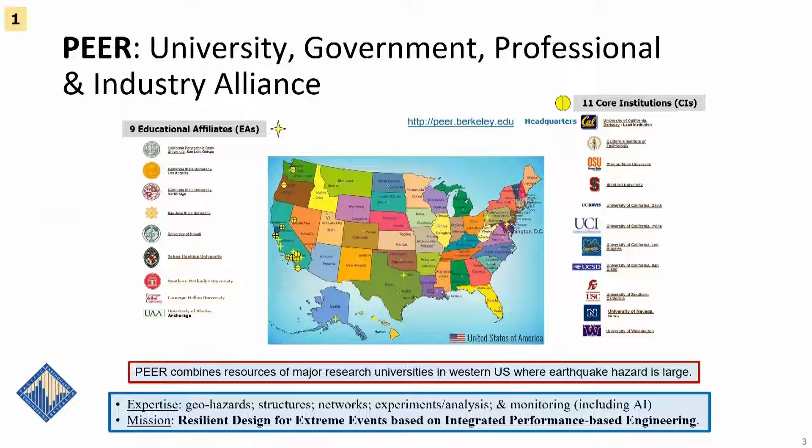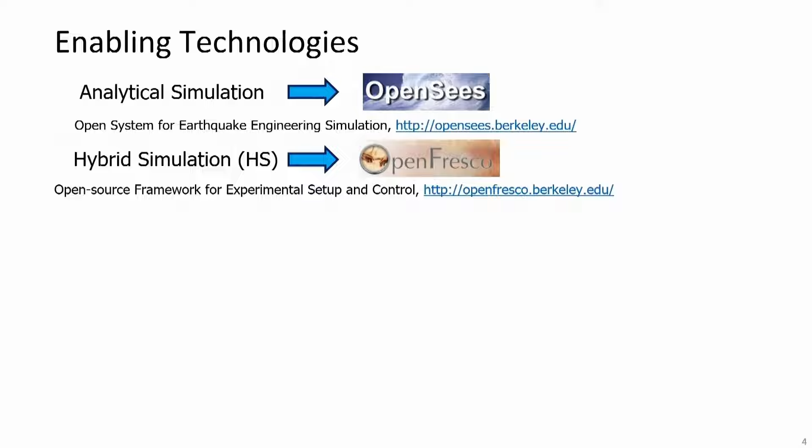PEER focuses on developing several enabling technologies for analytical simulation using OpenSees, hybrid simulation using OpenFresco, and also maintaining several databases for ground motion, PeerHub, ImageNet, structural performance database, seismic performance observatory, and also maintaining our technical report series, which currently has about 345 reports.

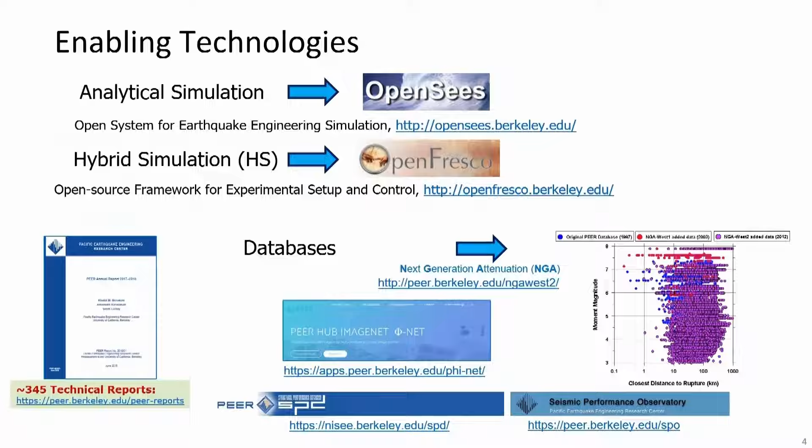So now I will talk about the motivation and need for BRACE2 research. The California State Highway System includes a wide variety of physical assets in 4 primary categories: pavement, bridges and tunnels, drainage, and transportation management system.

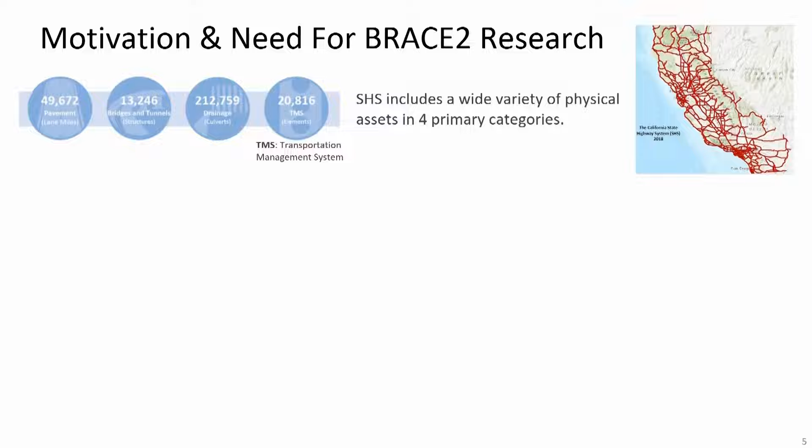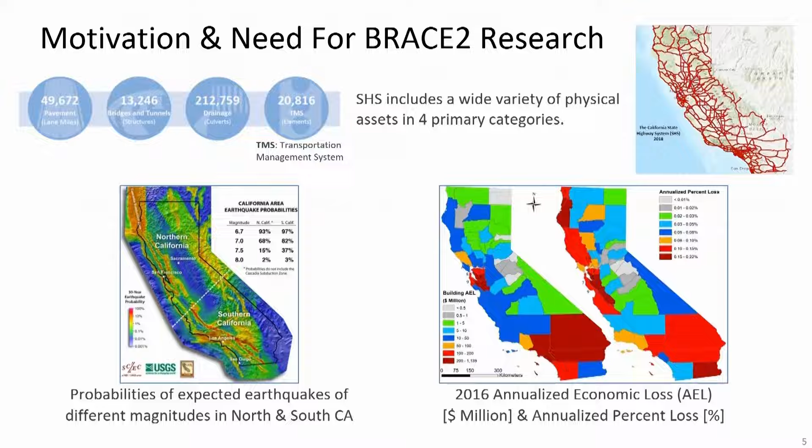BRACE2 focuses on bridges. We all know that the probabilities of expected earthquakes of different magnitudes in North and South California are high, and these high probabilities, together with the importance of the state highway system, raise issues related to the annualized economic loss, and also require having a monitoring system for proper assessment of such losses for achieving economical resiliency of the state of California.

About $25 million have been invested in strong motion instrumentation over the past 20 years. That led to 16 toll or major bridges to be instrumented, also 66 regular bridges, and having 33 geotechnical arrays. So there is a need to demonstrate that instrumentation can evaluate bridge conditions immediately following an earthquake, and BRACE2 will help response efforts of maintenance and post-earthquake investigation team.

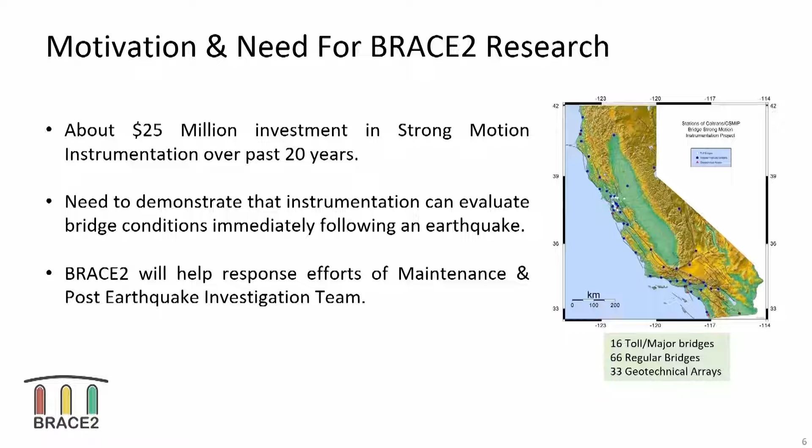The Bridge Rapid Assessment Center for Extreme Events, or BRACE2, is simply a data-driven structural health monitoring center. The objective is to develop a data and simulation framework for real-time rapid and near real-time comprehensive assessments of Caltrans, California Department of Transportation, designed and operated bridges, taking advantage of bridge sensors for condition assessment following earthquakes.

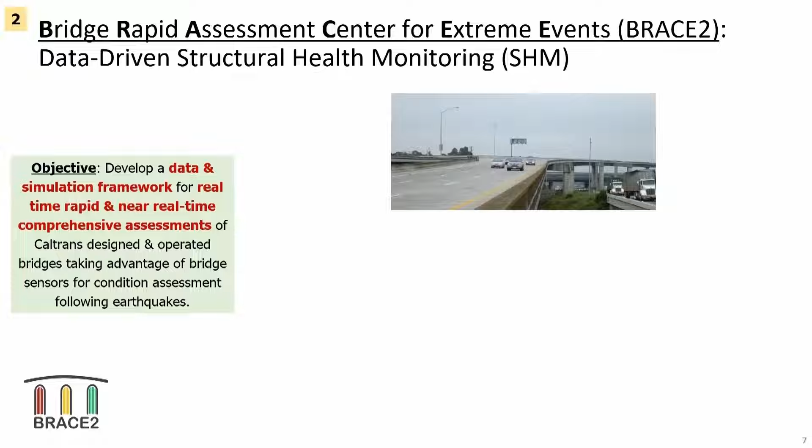So these sensors are typically accelerometers, where data is collected and then the data is used for vibration-based structural health monitoring. On the other hand, one can conduct vision-based structural health monitoring using images and videos. This type of SHM is not discussed in this presentation, and we're only focusing on the vibration-based structural health monitoring.

When data is collected, they are processed, and then decision is made whether there is damage or no damage, and that will lead to rapid or detailed maintenance reports that empower the maintenance crew to know what has happened following an earthquake event, such that maintenance operation or reconnaissance work can take place more efficiently.

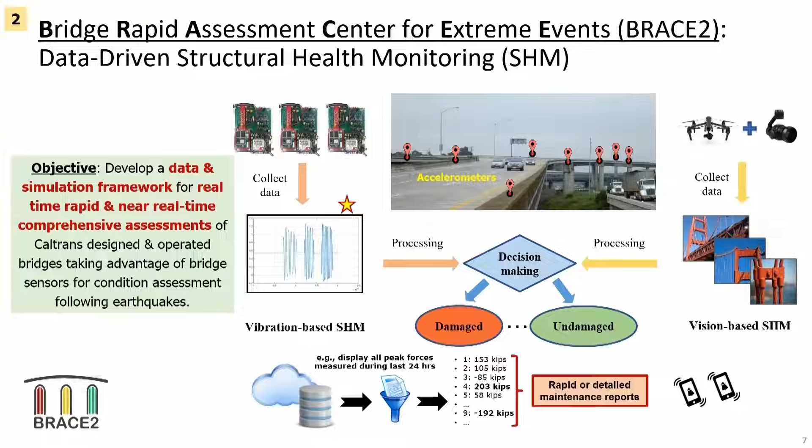In BRACE2, in this initial phase, we consider 5 bridges. The first bridge is the only one that is monitored in real time, where data is streamed to BRACE2 in real time. This is what is called the Hayward Highway Bridge. It's actually the intersection of highways 580 and 238 in Northern California.

There are 4 other bridges that we develop the necessary models for, and we make use of historical data for these 4 other bridges, but not in real time. These are the Meloland Bridge, Painter Street Overpass, Crowley Lake Bridge, and San Bernardino Interchange. These 5 bridges are located geographically in a distributed manner within the state of California to be a representative set of the different bridges in California.

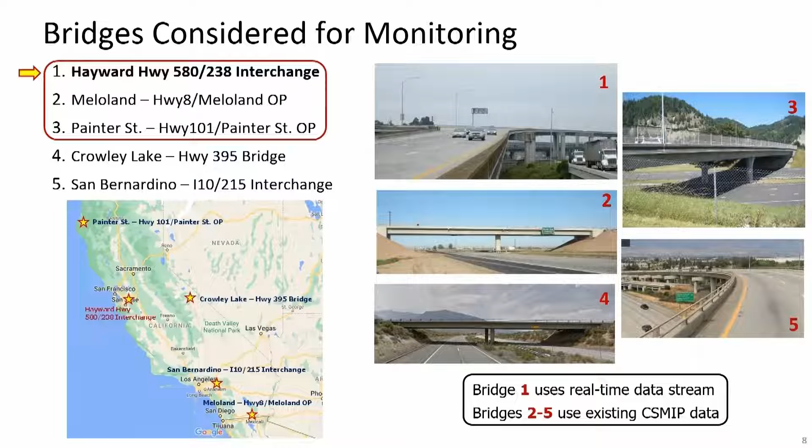The centerpiece of the work in BRACE2 is the Hayward Highway 580-238 interchange, or in short, the Hayward Bridge. It has 22 sensors on the superstructure, and also about 10 sensors for the geotech array, for a total of 32 sensors that are monitored in real time, with data streamed in real time to BRACE2.

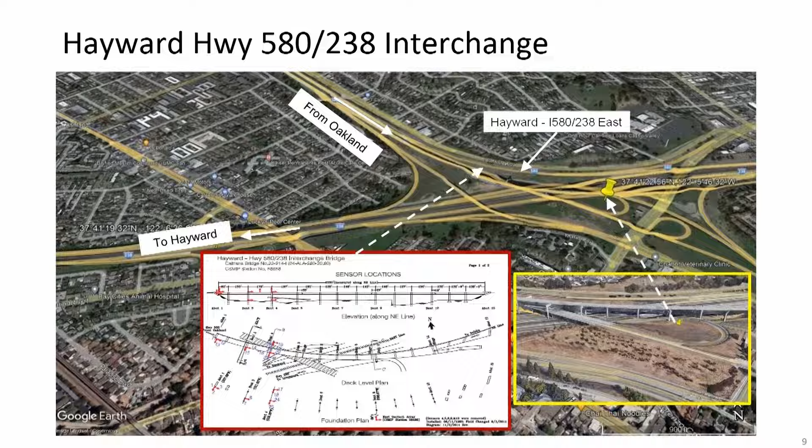The core components of BRACE2: at its center is the decision-making platform, or DMP, which receives data from the Hayward Bridge and its geotechnical array accelerometers in real time. This is done in collaboration with California Geological Survey, where we receive not only the processed data, but also the raw data in real time.

Together with component modeling, which determines the component limit states, we compare these limit states to the demand from the data, so we can inform Caltrans in real-time rapid assessment with recommended actions.

Another type of assessment uses the global bridge modeling and several model updating techniques, including machine learning, in the decision-making platform. With this global model and the data and the component limit states, we have near real-time comprehensive assessment, which is also passed on to Caltrans for more in-depth assessment, but it is not done in real time because running the global bridge model for the recorded ground motion consumes some time.

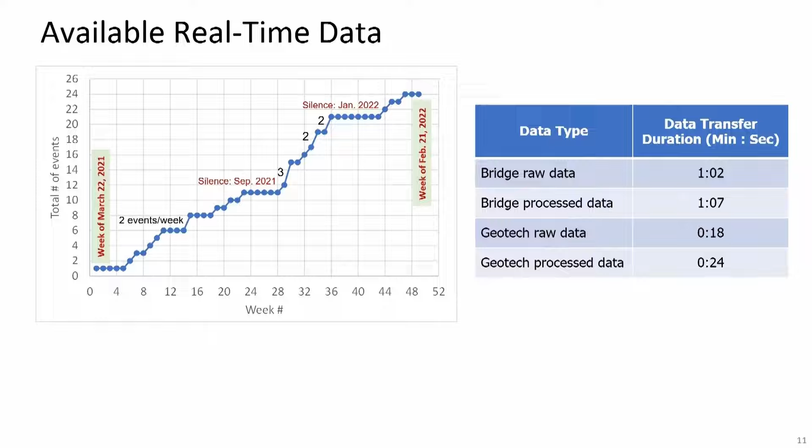The work with CGS led to having access to the data in real time for the Hayward Bridge. The work in BRACE2 started in August 2020, and by March 2021 we had that real-time access. Since March 2021 until very recently, we have received 24 data sets. Each data set is typically received within 1 minute from the end of the recording.

The number of events transferred to the peer server used for BRACE2 is increasing with time, as you see in this plot. For effective future operation within BRACE2, we are working on automated data processing, and all data, as I mentioned, is received within 60 seconds. The difference between processed and raw data in terms of delivery is about 5 to 6 seconds.

The Hayward Bridge global modeling uses state-of-the-art modeling techniques within OpenSees: modeling the columns using nonlinear beam column elements, modeling the cap beam and bridge deck using elastic beam column elements, modeling the in-span hinges with nonlinear springs, and modeling the abutments and soil-structure interaction, which is still work in progress, using nonlinear beam column pile elements together with different soil springs in different directions. Finally, the damping is identified from the data and used in the global model.

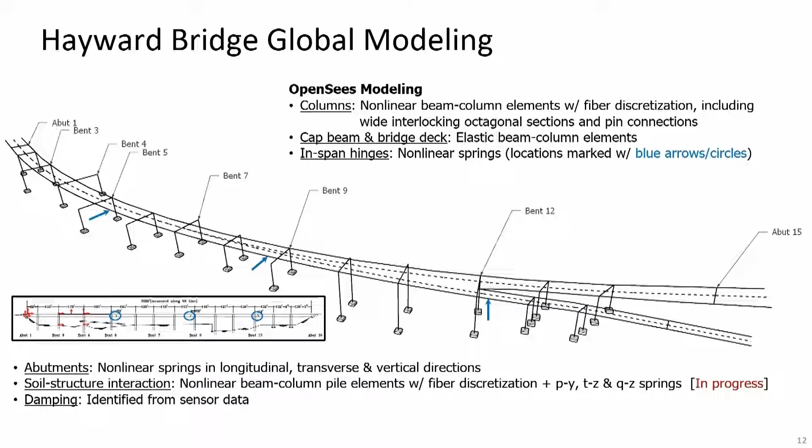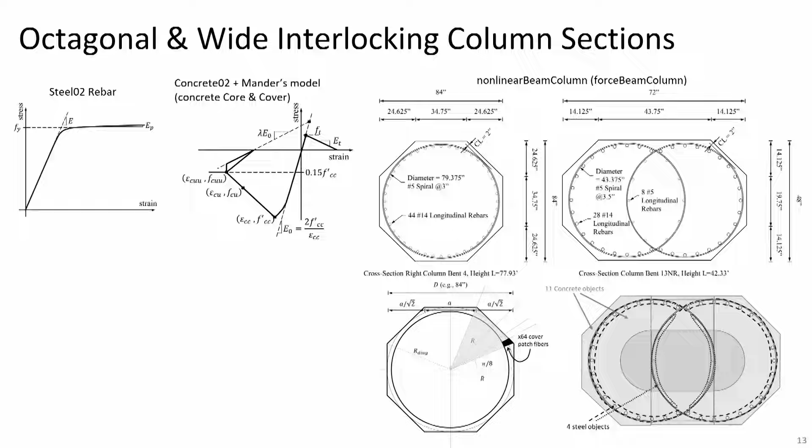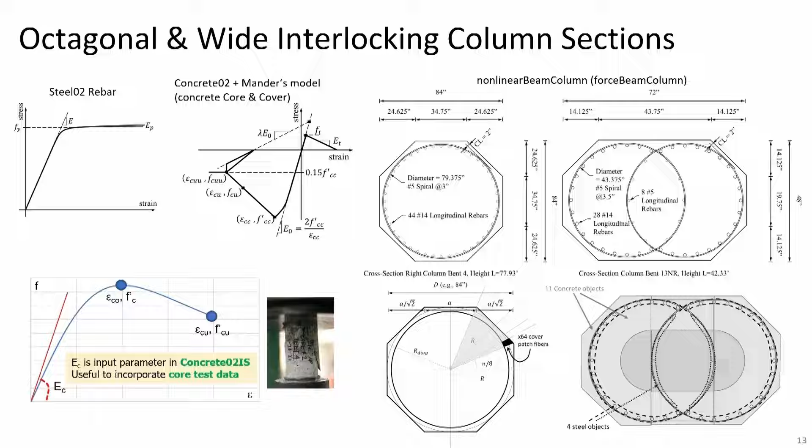This shows some details of the octagonal and wide interlocking column sections from the as-built drawings. We use different constitutive models available in OpenSees for the reinforcing steel and for the concrete, whether confined or unconfined. We also took several cores from the different columns of the bridge, and we are using the material properties from these cores for compression and tension as the material parameters of these constitutive models.

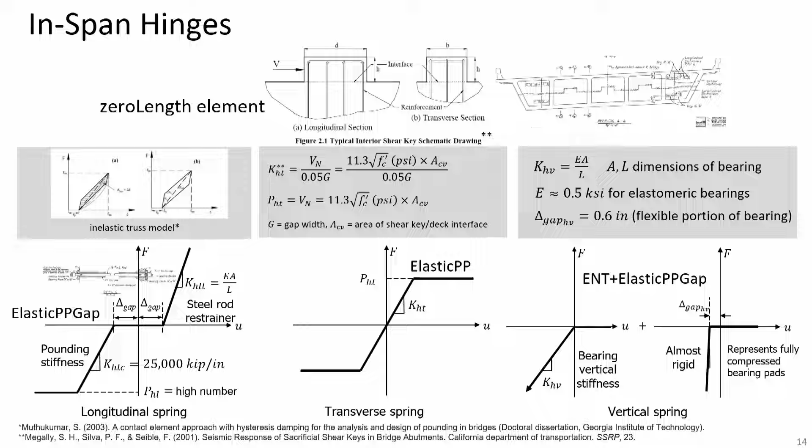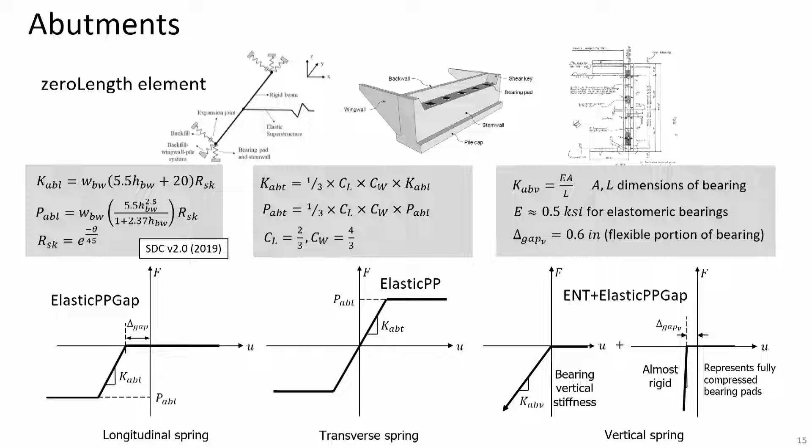This shows the in-span hinge model details in the longitudinal spring, transverse spring, and vertical spring. We also have similar modeling for the abutments, again in the longitudinal, transverse, and vertical directions. Most of these are not new models; they are available models in the literature or in Caltrans design specifications, and we make use of these state-of-the-art models in developing the global bridge model.

Several of the bridge bents at the base, or at the connection between the column and the cap beam, have pin connections. So we looked at a variety of modeling techniques. For example, M1 has all the pin connections modeled as rigid. M2 is the opposite: all pin connections modeled with free rotation about the X and Y axes. Models M3, M4, and M5 are in between, where different modeling techniques are used for these three models for the pin connection.

For example, M3 uses zero length elements, M4 uses zero length sections, M5 defines properties at specific integration points. These give different levels of robustness of the numerical model and the numerical solution.

This is part of model updating and validation with the data to obtain the best model that is representative of the bridge behavior, making use of the recorded data from the bridge.

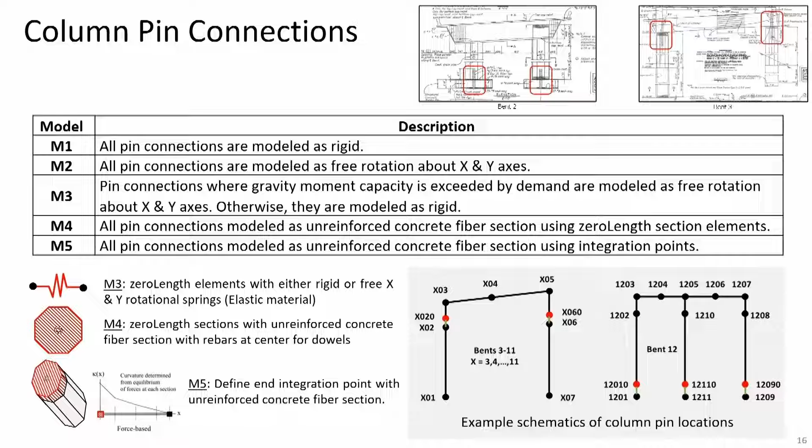So here I show you some results for these 5 models, where the numbers in blue show the different error levels, plus or minus, compared to the identified information in the form of the fundamental periods in the transverse, longitudinal, and torsional modes. This bar chart also shows for these 5 models the percentage error compared to the identified model frequencies.

You see that some models do better than others. From this investigation, we concluded that M4, for example, where all pin connections are modeled as zero length fiber sections, gave the smallest error for these 3 basic modes of transverse, longitudinal, and torsional mode shapes.

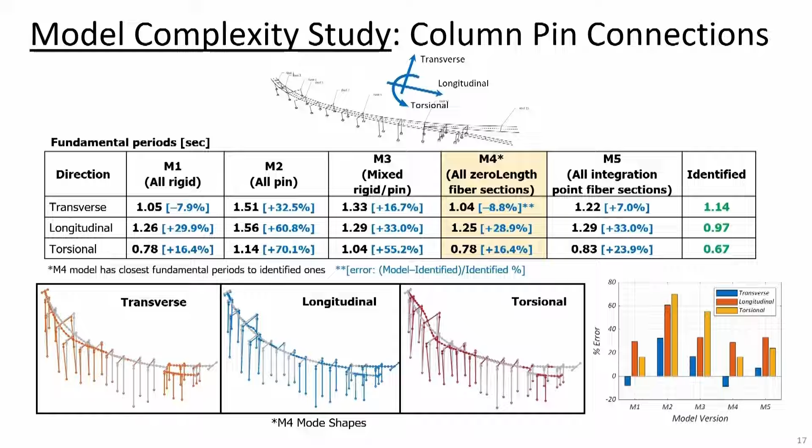Also, when we look at time histories comparison between recorded or measured and computed, there is still room for improvement. The absolute error here for the transverse direction is about 12%. For the longitudinal, still very high, 35%.

But there is still work in progress that is going for the boundary condition, modeling the supports, modeling the pile, the abutments. So there is still some updating taking place.

This is a particular small earthquake that took place in 2018 in Berkeley, and it was felt by this bridge.

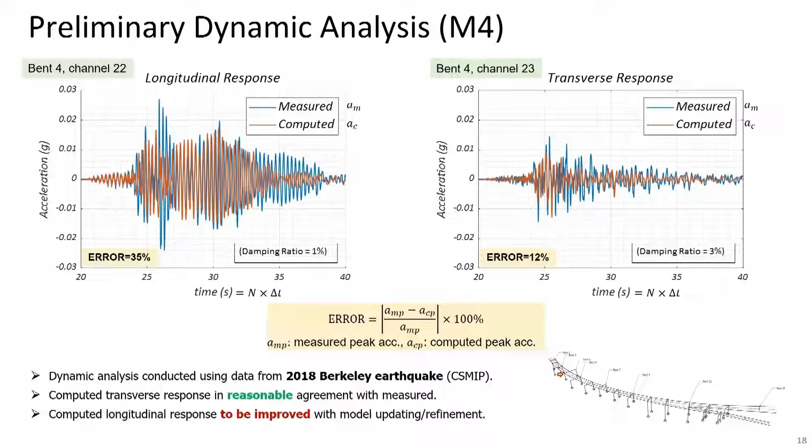So this is obtained from dynamic analysis that's conducted using this earthquake. And the computed transversal response is reasonable, but the computed longitudinal response still needs updating and refinement, which we are still working on.

The third part of this presentation is related to developing a relationship between damage and bridge operation actions. In Caltrans, there is this document called the First Responder Bridge Assessment Guide, which basically lays out 4 bridge operation actions.

R1 is the action where the bridge can remain open. R4 is the opposite: the bridge should be immediately closed due to collapse or major damage.

R3 and R2 are in between, where R3 is bridge should be closed and structure maintenance and investigation, or SM&I engineering inspection, should be requested. R2, bridge can be open and also SM&I engineering inspection should be requested.

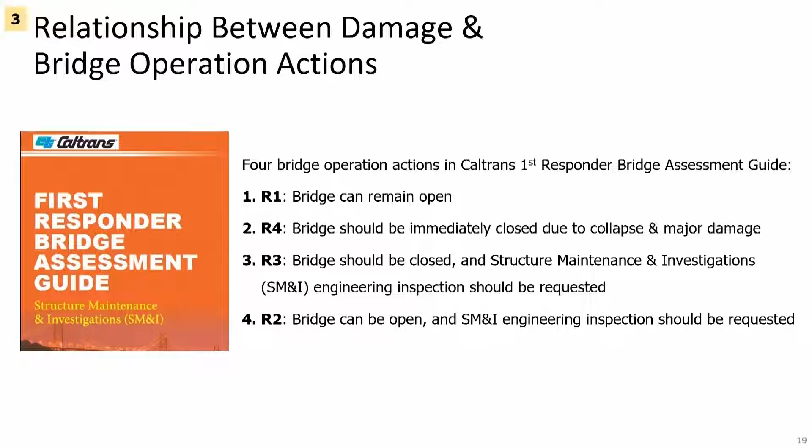Also in this document, there are several examples of visuals related to the bridge operation actions. For example, the third image from the left is core concrete crushing and rebar buckling, which will lead to an action related to a bridge closure.

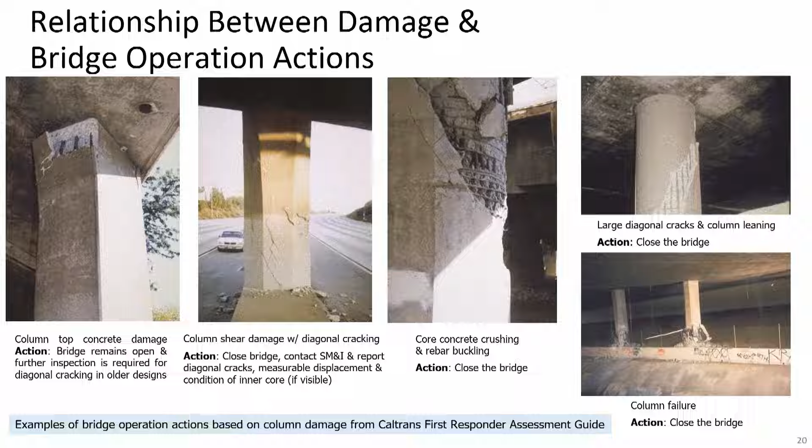The strain-based damage state is defined at different fiber locations of the cross sections, whether it's in compression or tension, and the value of the strain.

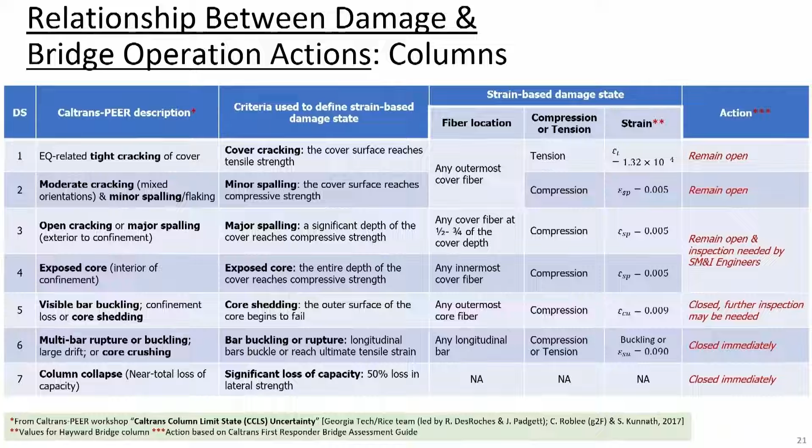So what we try to do is correlate these damage states to the bridge action according to the document I just showed you, whether it's bridge closure, bridge opening or closing, and considering inspection to take place with that action.

Here you see an example of one of the bents of Hayward Bridge, particularly bent 3, one of the columns of this bent shown with this yellow arrow, where you see the 7 damage states that are strain-based superposed on the pushover curve obtained from OpenSees and Abaqus of that particular column as a single component.

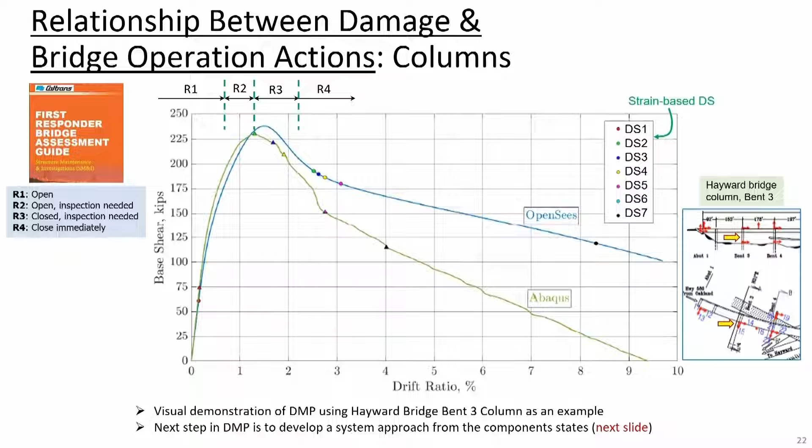And we also superpose the 4 ranges R1 to R4 from this document. And to make sure we are obtaining accurate values of these damage states, we also use a different definition of damage state.

Based on displacement calculations using this probabilistic damage control approach by Professor Saiidi and his collaborators at the University of Nevada, Reno, we convinced ourselves that our computed strain-based damage states are consistent with other damage states from the work of Professor Saiidi. Therefore, these first responder ranges are accurately estimated from these component models.

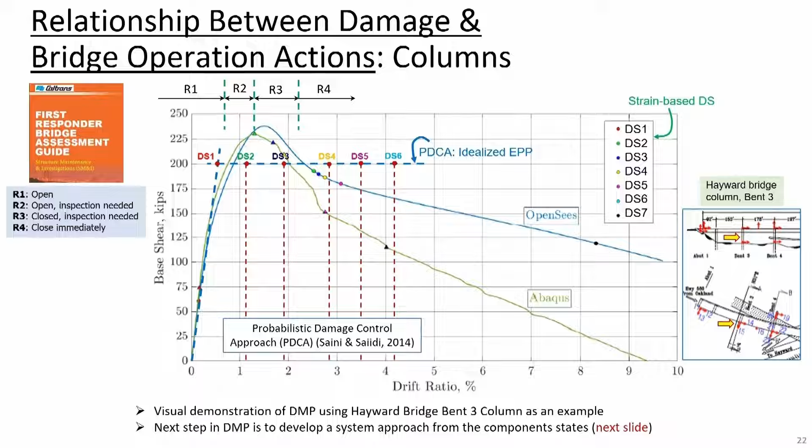The next step is to combine different components to find the relationship between damage and the bridge operation action, but on the system level. This is still work in progress, where we make use of available software and the philosophy of ATC, Applied Technology Council document 138, which was recently published.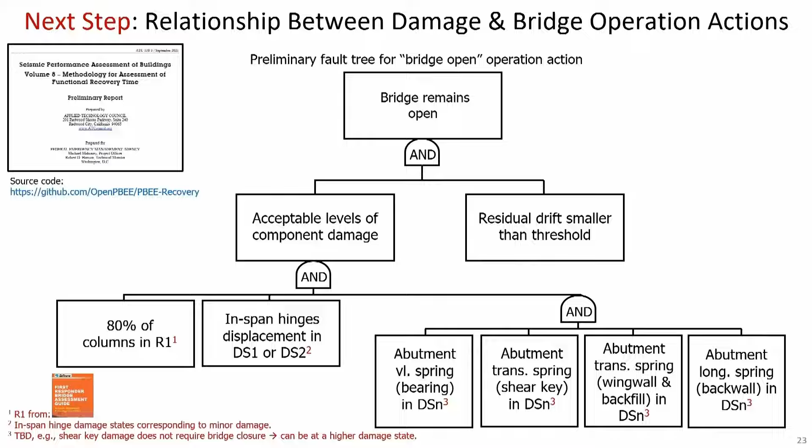The fourth part of my presentation relates to system ID, and I'll show you that for another bridge, the Painter Street overpass, which is one of the four other bridges we are considering in BRACE2. This bridge was subjected to an earthquake that occurred at the end of last year, in December 2021, called the Petrolia earthquake. It's a sizable earthquake, magnitude 6.2, but it was far from this bridge, which is why the shaking is not very strong.

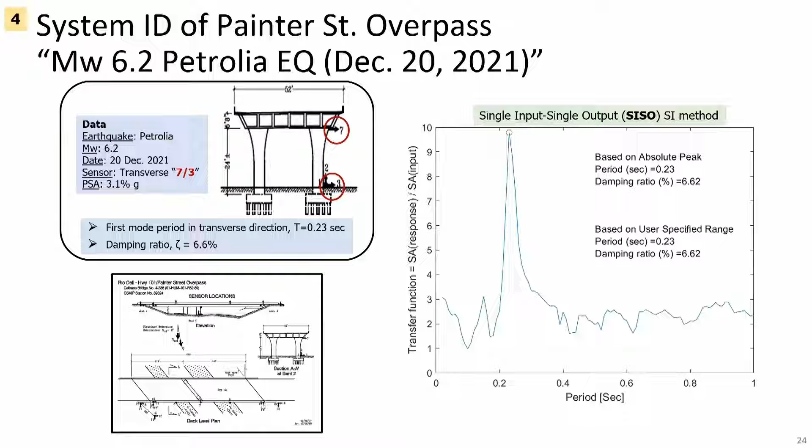So here we use this data to develop the single input, single output system identification method using transfer function, where we identify the damping and the dominant frequency. We also developed and implemented methods that use multiple input, multiple output, shown here also for the same bridge.

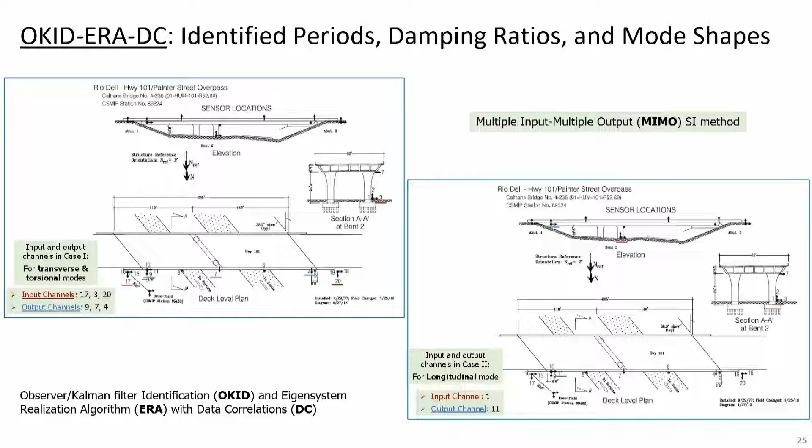One of these methods is observer Kalman filter identification and eigensystem realization algorithm with data correlations. That multi-input, multi-output method helps not only in identifying modal frequency and damping, but also mode shapes. Here we see the transverse mode and the longitudinal mode, where the identified modal frequencies and damping are reasonably consistent with the single input, single output method using the transfer function.

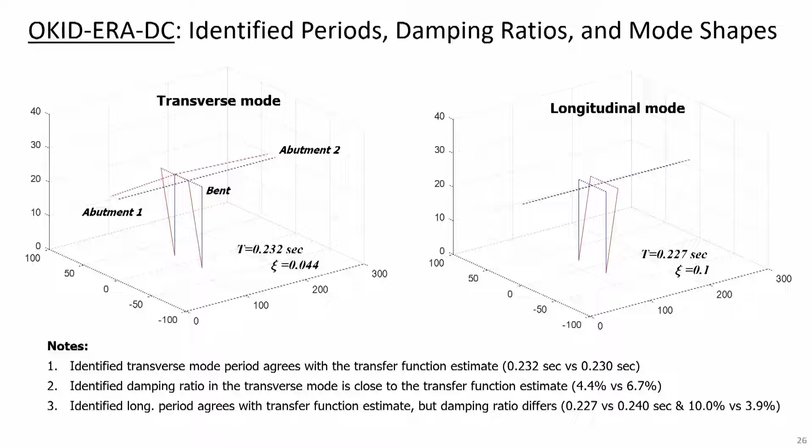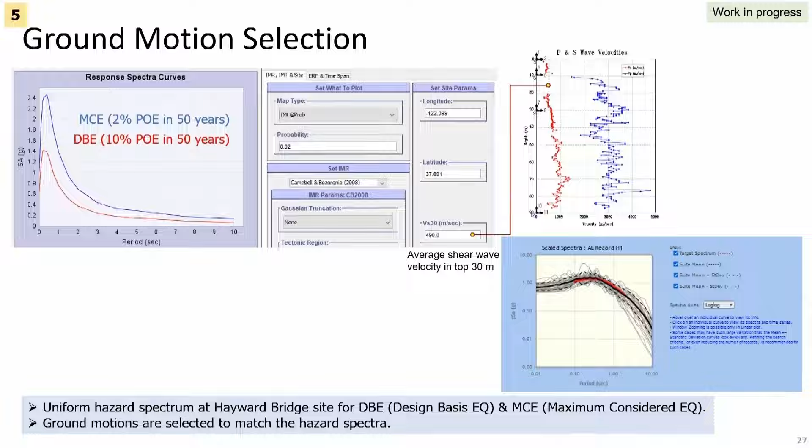The last part of this presentation is to talk about work in progress. What we're currently working on is using longitude, latitude, and VS30, the shear wave velocity from this velocity profile from the geotech array, to determine the hazard curve for design basis earthquake and maximum considered earthquake, and then select a large set of ground motion from the NGA database, so we can use this ground motion together with the global bridge model to run simulations that we subsequently use for machine learning based damage state identification. So now that we have the finite element model available, which we just developed,

that's basically the digital twin. We will subject it to this selected set of ground motion, then form the synthetic data set, which we are going to label for the different damage states, and use this for training machine learning models. This will be autoregressive integrated moving average machine learning, long short-term memory method, or human machine collaboration—different machine learning models we've worked with in the past.

We then use an ensemble modeling technique to select the best trained models amongst these, such that during the operation stage, when we have the real bridge—the Hayward bridge, in this case—we obtain data from the sensors and feed it into this trained model so we can make predictions about what damage state this bridge is experiencing, facilitating the decision making that we pass on to Caltrans.

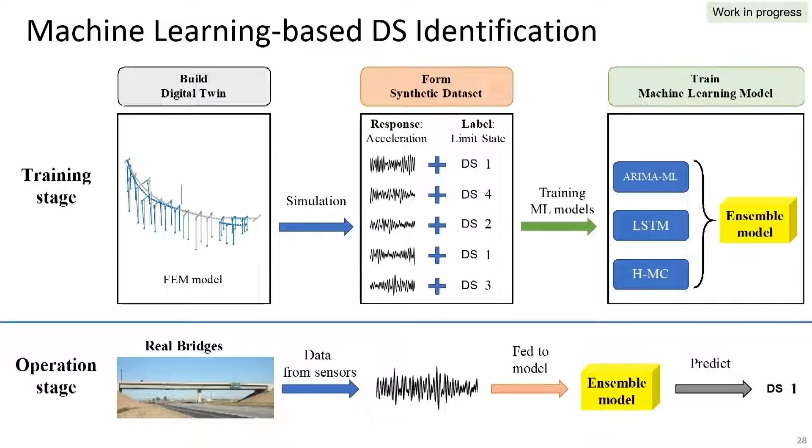The last piece we are working on is developing a user interface where one can select the bridge amongst the 5 bridges we are considering, and then perform a variety of sensitivity studies using, for example, a tornado diagram, which is a deterministic sensitivity analysis, or show mode shapes like transverse or longitudinal, or pull out historical data. This is shown here for Meloland, for example, plotting the transfer function for a large set of previously recorded motions using input and output from particular sensors to get the transverse or longitudinal mode.

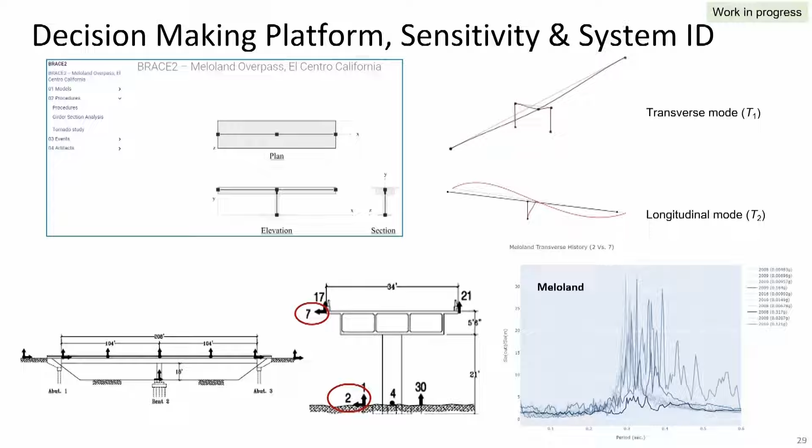Finally, the contributions of this work include real-time access to sensor data from the bridge, particularly the Hayward bridge; definition of damage states consistent with bridge operation actions; detailed global models of bridges, the 5 bridges considered in BRACE2, particularly the Hayward bridge, with capability of model updating; system ID of instrumented bridges; and finally developing a plan for short and long-term activities for Caltrans bridge asset management.